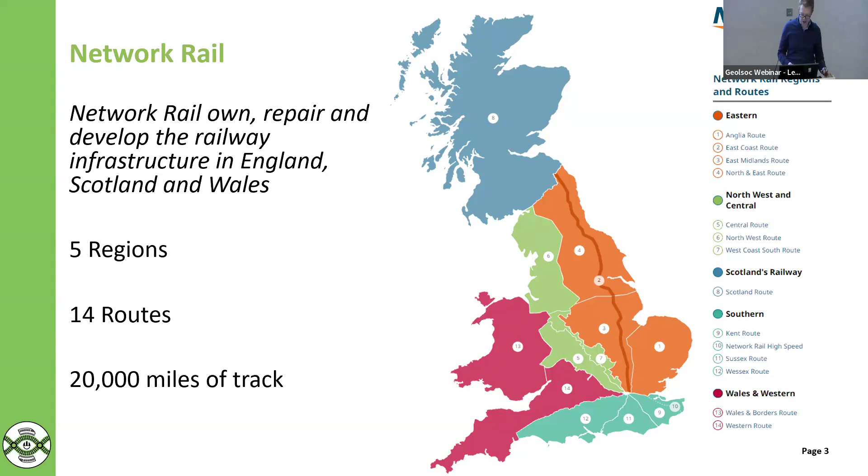So Network Rail Earthworks - there are about 192,000 100-metre segments of earthwork that we look after. The peak of construction was in the 1840s and 50s. Some earthworks are a bit younger, some of them are pre-Victorian.

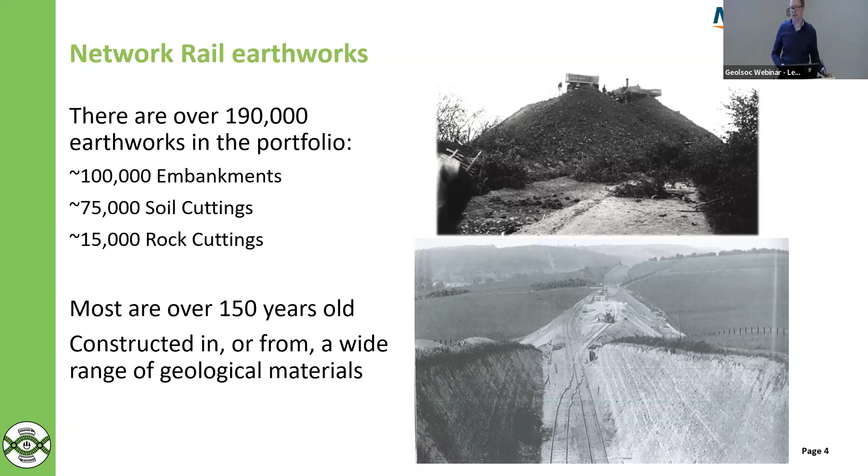I think we judge the original railway builders somewhat harshly through the lens of a modern design code sometimes. I expect most people here are geologists or engineers and have probably at some point or other worked for a demanding, geotechnically unaware client or manager. Imagine what it was like then, when there was immense pressure to build and open railways as soon and as cheaply as possible, to firstly attract the capital investment, but then to expedite the return on capital. So really the engineers had no choice but to minimise costs through minimising energy, land take and earth moving. And what we're left with today is a legacy of oversteep earthworks.

So formal management of railway earthworks began in the late 1990s following a fatal accident at Ais Gill on the Settle and Carlisle line, which had just been saved from closure at that time. The foundations were laid then for our principal controlling standard, NR L2 CIV 086, management of earthworks. And what we're talking about tonight are some substantial changes to Module 1, evaluation, and Module 2, assessment, which we'll come on to.

The catalyst for such significant changes was another fatal incident at Carmont in Scotland in August 2020, where 3 people died. That was the first such incident since Ais Gill. There were several investigations following Carmont, but one of them, commissioned by our Chief Executive Andrew Haines, asked Lord Robert Mair to undertake a holistic review of earthworks management in Network Rail - the scope of that review wasn't constrained to the factors around the accident. Lord Mair's task force reported back the following year with over 50 recommendations for Network Rail to address.

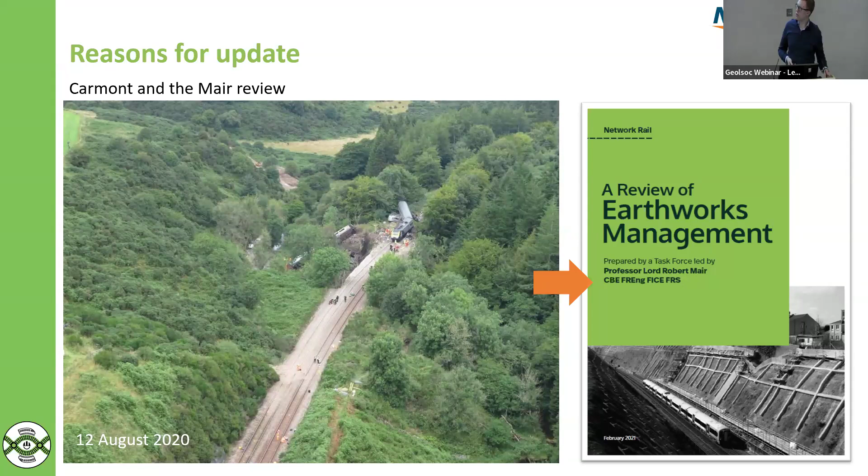So just looking at our management of earthworks in a simplified way, we start off gathering data. More often than not, that has been using people equipped with tablets or iPads on site, but is increasingly drawing on other means of data capture. We make decisions about earthworks in a process called evaluation, the management actions needed and the management strategies that are appropriate. We prioritise actions because we live in a constrained world and we can't do absolutely everything we would like for our earthworks. And then finally, we get to the point where we're taking action. That can range from rebuilding an earthwork, which is done very rarely, to writing a letter to an adjacent landowner asking them to do or not do something with drainage or vegetation management.

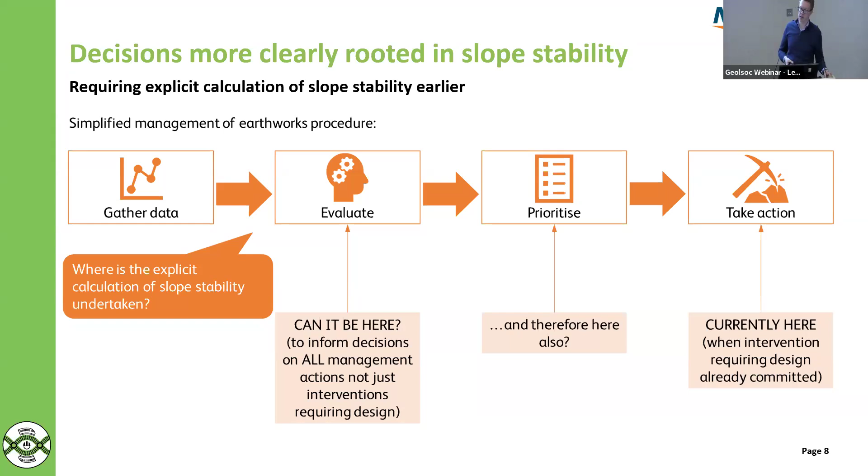So one of the themes of Lord Mair's questions and recommendations was where in that procedure is the explicit calculation of slope stability? And the honest answer is, once we're already at the take action stage and once we've already committed to a renew or refurb type capital intervention and we are undertaking assessment as the basis of geotechnical design. A really strong challenge came back as to whether that can be done much sooner in the process. Can we be thinking about slope stability much more formally at the evaluation stage, which would then benefit prioritisation as well?

So we have been, over the last few years with the team at MOTS, trying to address that question. In a nutshell, what we've done is reconfigure the evaluation procedure around a novel tiered earthwork assessment approach.

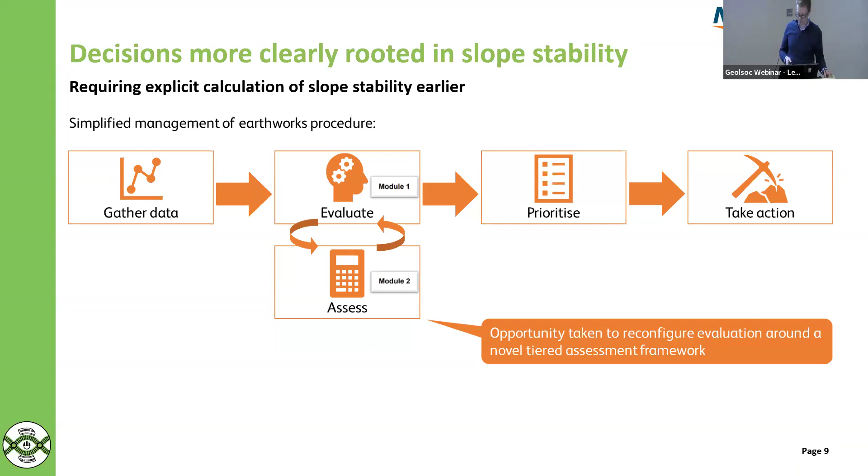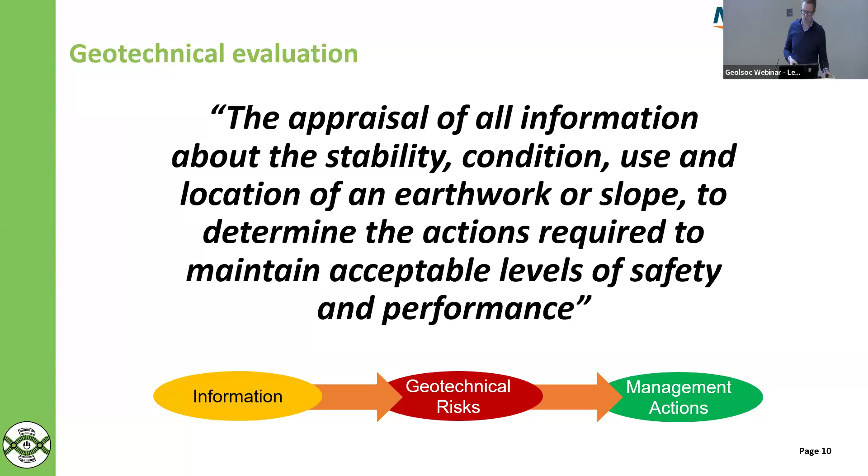So the aggregation of these structured and searchable risk statements across physical whole earthworks, across lines of route, across administrative geographies, then gives rise to a geotechnical risk register in a slightly different way to what most people might understand it from projects. But my view is that this will be an incredibly useful tool in the communication of risk, especially with non-geotechnical audiences, the calibration of the risk compass between different evaluators and asset engineers, and really the sort of audit question on why are we undertaking actions and what problems are we actually solving.

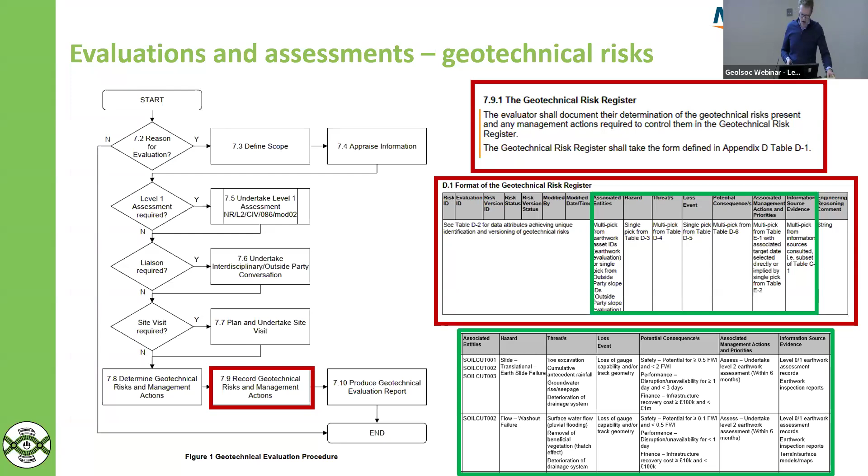So the role of assessment, which is a different procedure within NR 086, is to help the evaluator actually determine and formulate those geotechnical risk statements. That's rarely done at the minute, and we'll come on to why, but the whole idea of the tiered assessment framework is to give the evaluator an assessment and therefore an answer to the question of slope stability for every evaluation undertaken for any reason at any time.

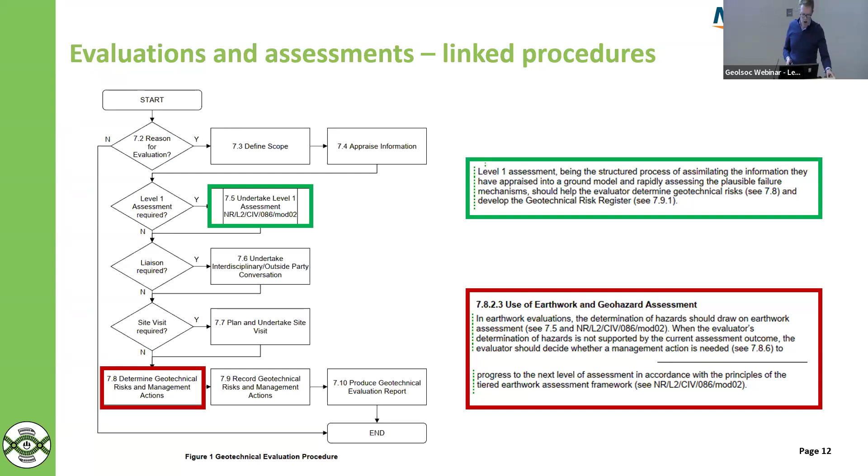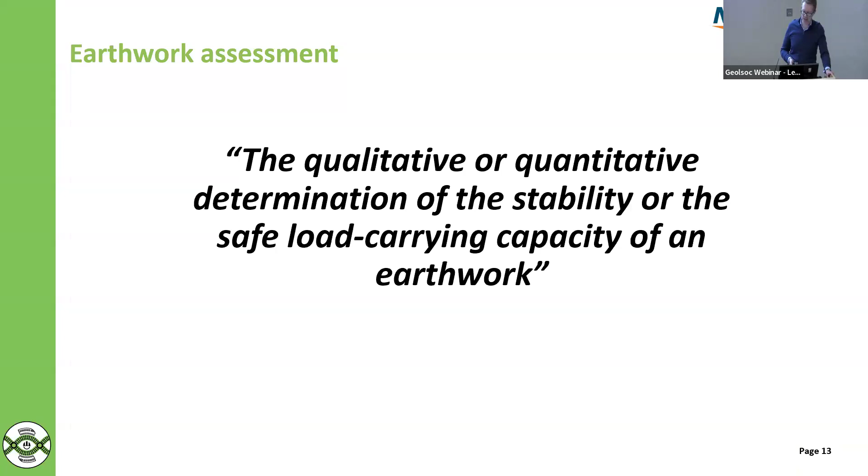So assessment, we also have a definition that has been largely unchanged since the birth of Network Rail: the qualitative or quantitative determination of the stability or load carrying capacity of an earthwork. And the question really is, well, why haven't you just been getting on and doing assessments, and what is now magically different in the new approach? So let me just introduce some of that.

It comes back to cost. When we are traditionally thinking about assessment, I'm sure most people have in their mind's eye skilled people using sophisticated software, trying to execute analyses like limit equilibrium or finite elements or whatever to produce useful quantities like displacements or factors of safety. That requires knowledge of failure mechanisms, knowledge of the ground model, and that in turn requires expensive activities, which are especially expensive on the operational railway, like ground investigation and monitoring, certainly site inspection and desk study and so on. So the cost of all that for one of those 100-metre earthwork segments, we estimate, is broadly comparable with a refurbishment type intervention, which typically might be installing a crest drain or a localised regrade over 10 metres or something like that. So why do the assessment? Why not just do the refurb?

If we were to assess all of our earthworks, the cost would be in the region of £9 to £10 billion, which dwarfs our annual all-in £300 million expenditure nationally on earthworks. So clearly we have to do something different. We can't do what we've traditionally been doing.

So the new framework retains all the wonderful things that have been developed over the years in terms of traditional assessment, whether using conventional or advanced techniques, and augments that with lower level assessments. This is the nub of it, where you have to accept a trade-off of the assessment outcome certainty and the ground model maturity with a lower cost that then enables us to apply the assessment much more widely, and in fact to all of our earthworks, so that going back to evaluation, we've at least got the lowest level zero assessment available to the evaluator.

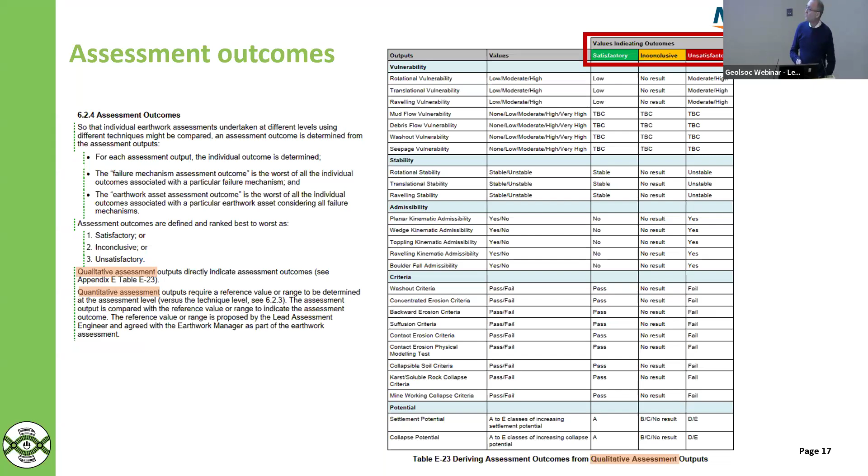So reading across any number of those, you can see something like looking at stability against a rotational failure - you can get an output that is in a stable or unstable state, which you can then map up to satisfactory and unsatisfactory. It's looked at in two ways, really, depending on the types of assessment techniques that are carried out. You can either have the qualitative type assessment or the quantitative assessment, which Mike referenced in the actual statement of the definition of an assessment.

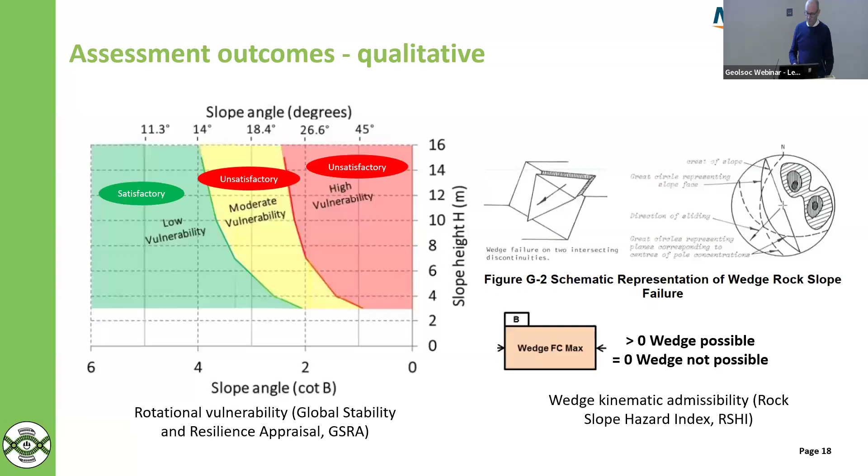Whether in reality, as you dive into more of that, it might be stable, but at the lowest levels it starts with that assumption. A quantitative assessment is where you're actually getting a number coming out from some kind of analysis.

So if you end up with a factor of safety in excess of that reference value, you're in a satisfactory state. If you're below that reference value, then it's an unsatisfactory state. It hasn't gone as far as stating what that reference value would be, because that's going to vary job to job, the decision that's been made.

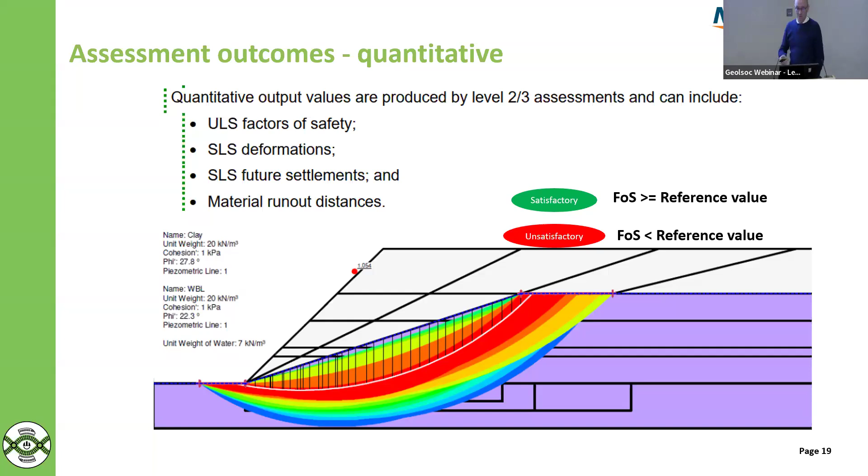So back in the day when you might have been looking for a factor of safety of 1.3 for analysis, we're not in that world anymore. It's decided on a site-by-site basis.

So another part of the assessment methodology is this concept of levels, and Mike introduced that quite well. From level 0 through to level 3, you're moving up in the complexity of the method, the amount of information that you're gathering. Your surety is going up, your uncertainty is coming down, but the cost is going up. So you can rationalize the assessment methodology as having level 0 being a virtual assessor carrying out a fully automated assessment, using methods and data available for the earthworks, but it's got the largest number of assumptions in the way that it's calculated, all the way through to the top level.

Level 3 is when you're at the real high-end level of assessment, and that's where we might be talking about finite element type analysis. You've got a lot of ground investigations being carried out, a decent understanding of what the groundwater is doing, etc., which obviously comes with the greatest cost.

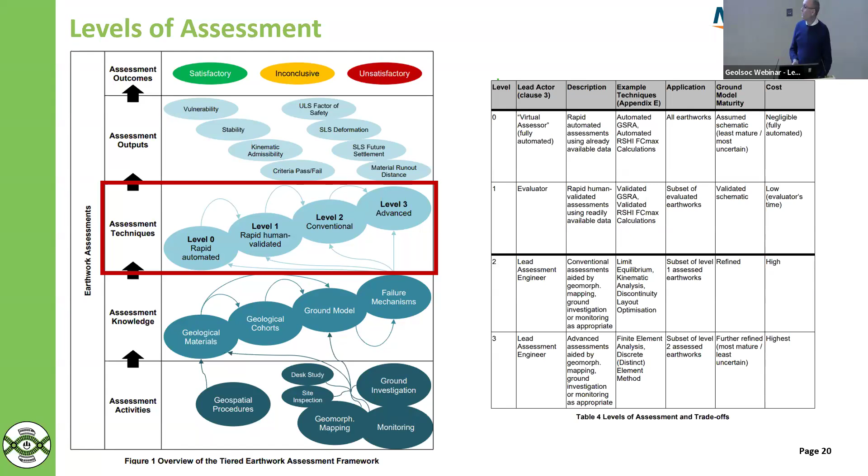We won't go into this in huge depth because I want to get onto more of the knowledge side of it and the geological concept constructions. But within the guidance in the module, we've gone through and carried out a detailed review of the types of analysis and assessment techniques that can be carried out.

They've been grouped together into generic types of assessment, so you know, GSRA plots are there, limit equilibrium, etc. They're related to the different levels of assessment, and then they relate back through to the type of failure mechanism that you're carrying that analysis out for.

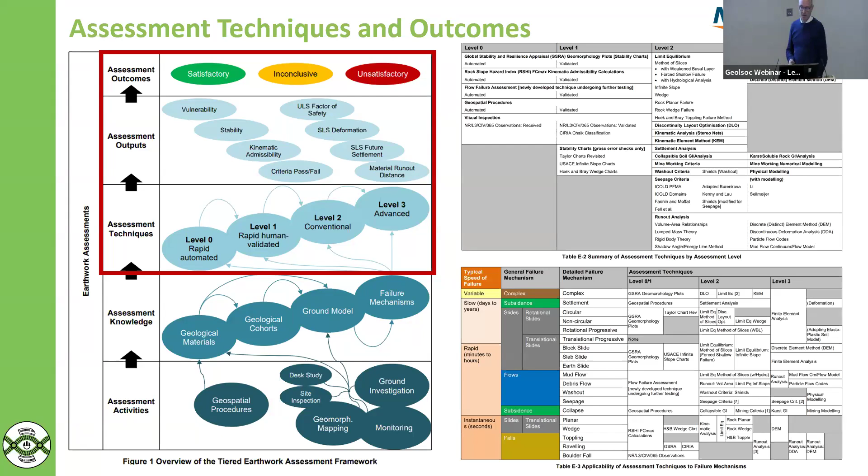It's not as prescriptive as saying the types of software that would then carry that out, because obviously that's something that can change over time. But it does go through the current types of analysis techniques that can be carried out for each of these things, recognizing, of course, that might change.

So moving down below the different techniques, the key thing we want to focus on now is thinking about how you feed those techniques with the knowledge that's required. And this is really where engineering geology has got the biggest part to play. So there are four bubbles you can see associated with assessment knowledge.

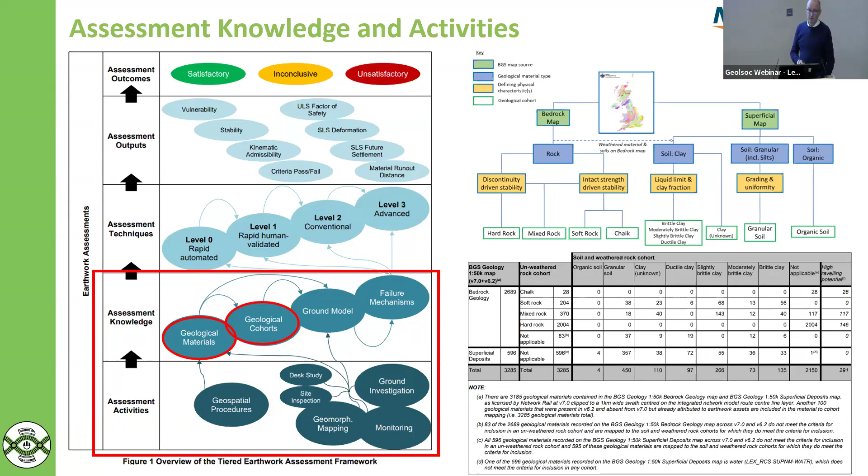I'm going to start by talking through geological materials and how those have been related together into geological cohorts. Then Verity is going to take us through the ground models and the failure mechanisms and how they feed into the process. So, geological materials and cohorts.

So the rail network that Mike introduced earlier, 20,000 miles of network, is interacting with 3,285 different geological materials as recorded by the British Geological Survey. That's about 2,700 bedrock materials and 600 superficial materials from their mapping.

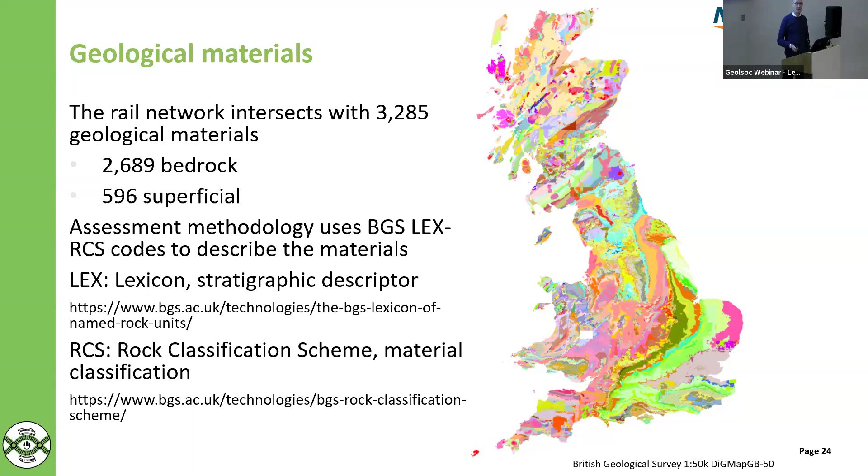For us to go through and assess and use all of that information on an asset on a code-by-code basis is plainly not feasible. So what we've made use of right from the start in the GSRA methodology is the BGS's lexicon RCS codes, which is a combination of the lexicon, the stratigraphic descriptors, and their rock classification scheme, which gives material classifications. We've used those as a means of grouping together different geological materials that have similar engineering behavior so that we can then consider the assessment against that level.

So this diagram shows how that grouping together, that cohorting, has been carried out. From a consideration of all the materials represented by the geological map, we look at both the bedrock map and the superficial map.

The bedrock is split down into rock, where the stability of a slope is driven either by the discontinuities within it, or on the other side by the intact strength that's driving the stability. Out of that, four cohorts for rock come out: hard rock, mixed rocks, soft rock, and chalk.

On the superficial side, for most of it but not the entirety, we've got the soils, where we split things down into clay materials, granular materials, and organic materials. The clays - I've got another slide which I'll come on to - we divide its behavior up by liquid limit and clay fraction. The granular soils are divided much more by grading and uniformity. You'll recognize the little dashed line coming across.

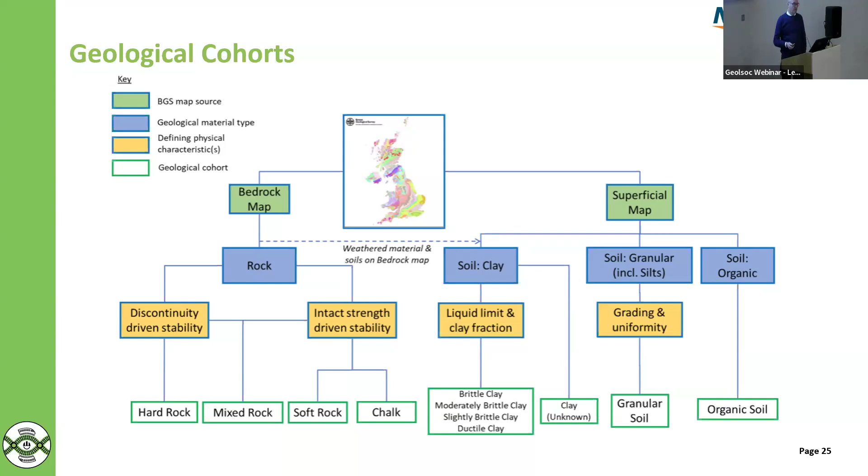Within the process and the guidance we set out, we take account of the fact that certain bedrock materials can weather to being in a soil-like state, and that's considered within the process, bringing them over into the clay cohorts. So the clay cohorts are subdivided according to their plasticity behavior within a chart which has axes of liquid limit on the x-axis against clay fraction content on the y-axis, building on work that's come from other asset owners through the years.

It's been applied in London Underground, it's been applied by Highways Agency, as was, and essentially divides up the materials into cohorts we've called the brittle clays. So that's where you've got your high plasticity clays, slightly brittle clays and moderately brittle clays, and ductile clays within different regions of that chart.

By classifying materials within those groups, we can start to bring together typical geotechnical parameters that allow us to feed that into slope stability calculations and start deriving those slope stability charts.

On the right is a piece of work included within the guidance that compares that method of dividing clay materials up with one way of looking at it, around a bounding value of a PI of about 25%, where you can see that tipping point between materials behaving in a brittle manner with a drop in strength from peak to residual, moving over to materials which are much more ductile. You can see it relates very well - the light lines show how that PI boundary would plot.

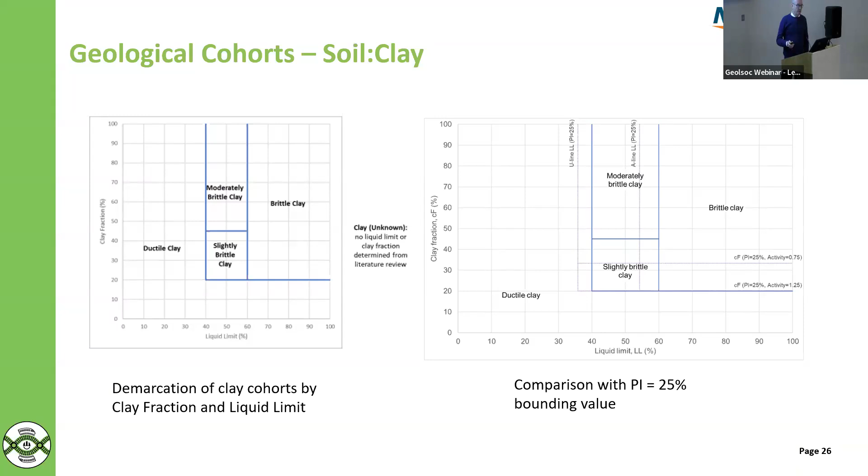What we get by doing it this way is a little bit more finesse in how the materials can be split up. This chart allows us to define bands around the different geological cohorts, and you can see examples of the types of materials that fall within those cohort names, which are kind of typical groups I'm sure a number of you would have worked with over the years.

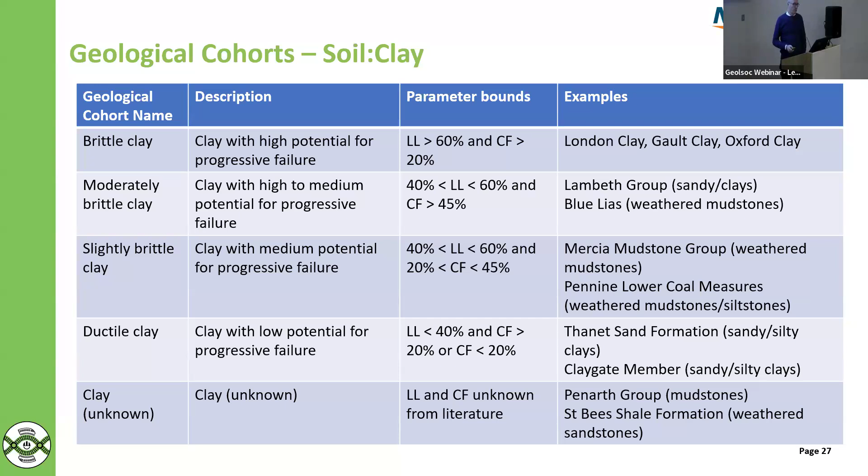I'm not going to go through this in huge detail, but one of the things also considered within the methodology is the potential for materials to weather from their bedrock state and become an issue as weathering to a soil, such as the over-consolidated high plasticity clays that feed into that. But also older mudrock and mixed rock materials can weather, and the biggest failure mechanism problem then becomes around the raveling of those slopes.

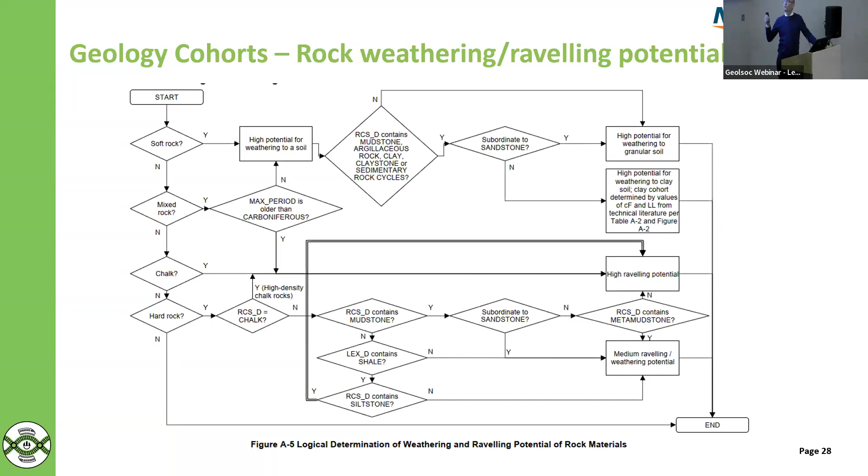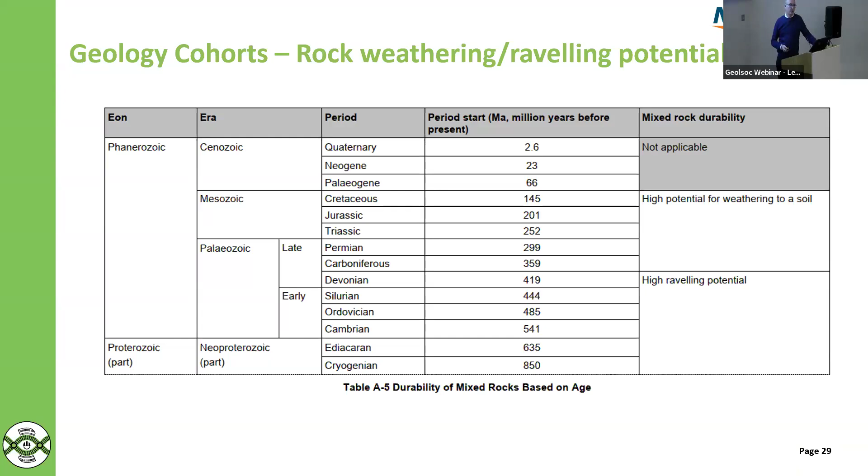This diagram takes you through the recipe by which the codification applied by the British Geological Survey units feeds through into the cohort that each of the materials has been put into. Just to add a bit more geology, here we show that the bounding age for the potential for weathering to a soil is set at Carboniferous and younger, and the older, more indurated rocks from that point are the ones considered to have the higher raveling potential.

One of the big challenges with Network Rail's assets, given their age and the lack of records held for them, is actually understanding what they're constructed out of. For cuttings, you can have a reasonable stab at what you're dealing with by looking at a geological map. When you're looking at embankments, obviously there's a lot more of a challenge.

So one of the pieces of work done, the body of work that's fed into this, was looking at trying to back-calculate what the embankments are likely to be made out of by virtue of their proximity to nearby cuttings that would have provided the fill material for those embankments. One of the early embodied pieces of work required was to look at the railway and back-calculate how it was constructed. We've got the engineer's line references which describe the individual routes, and we did an early piece of work to determine the age of construction.

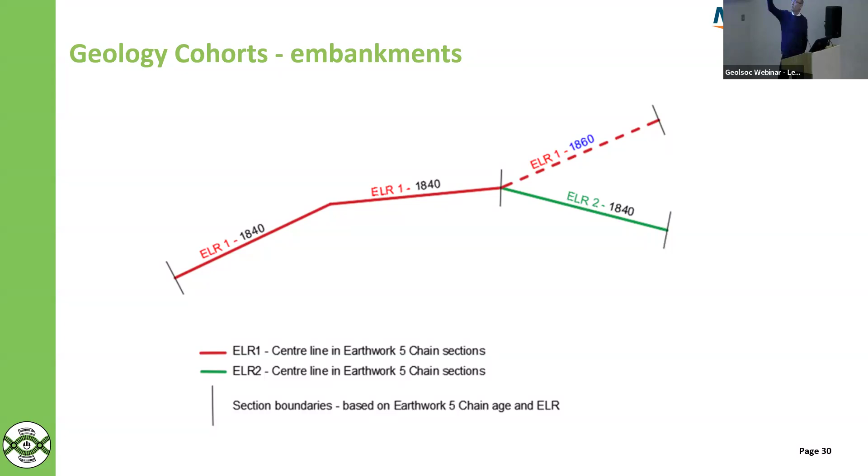This example shows how we would split this section of railway into 3 areas of construction. ELR number 1 has a construction date of 1840, and we can consider everything in that as having some kind of mass haul balance. We've got another section of the same ELR with a different date, so we consider that separately. And another section built at the same date but in a different part of the railway, so we split the network into these sections.

By applying that thinking across the whole network, we get as good a calculation as possible of the materials that would have been dug out of the cuttings. We can then apply that through a GIS procedure to keep filling up the nearest embankments until the volume of fill from the cuttings is used up, including an element of the bulking that would have occurred and the lack of compaction on the other end.

Because we get these calculations at discrete sections along the network, we can extrude that out onto the entirety of the network's length. Through that calculation, we can bring the geological materials of the nearby cuttings into the embankments. So it's almost like a back-calculated mass haul calculation.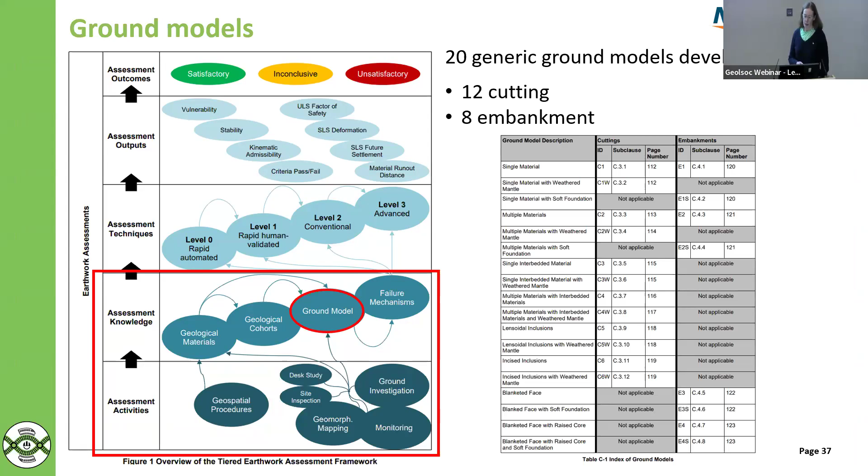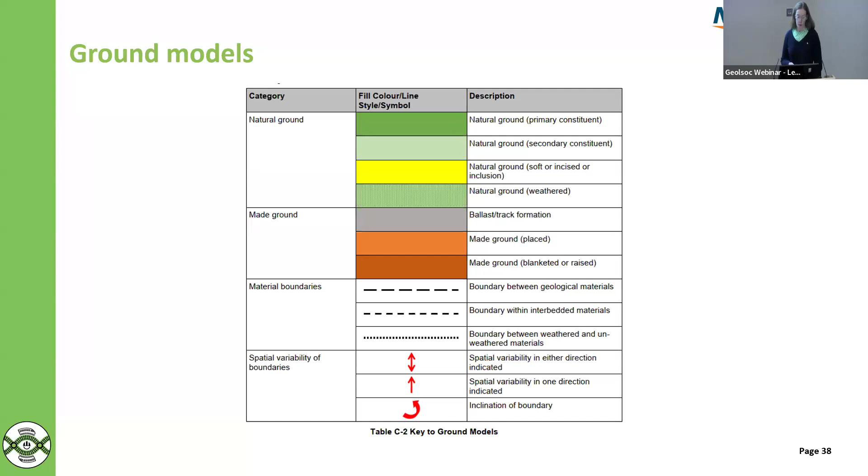As part of the task, we defined 20 generic ground models, 12 relating to cuttings and 8 to embankments. Each of these was defined, as shown in the schematic, in terms of whether they were natural ground or made ground, but also with the material boundaries noted, since ground models invariably have so many possible variations that we needed to simplify this down to something usable that still captured that variation within the definitions.

As part of this level 0, level 1 approach, when you don't have a lot of information, it can be applied across the whole network. The ground model is assumed, for example for cuttings, as a single material. There were 12 different ground models for cuttings. On the right-hand side you can see variations where you have interbedded materials underlain or overlain by a single material, noting the enormous amount of variability you could get with this.

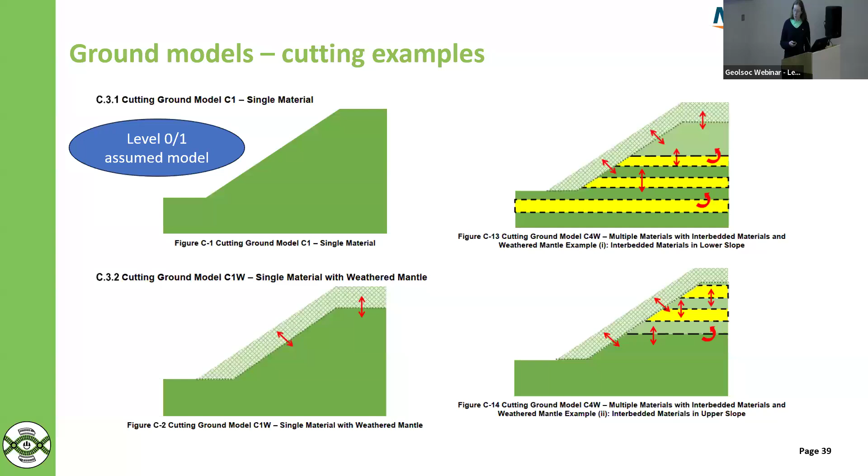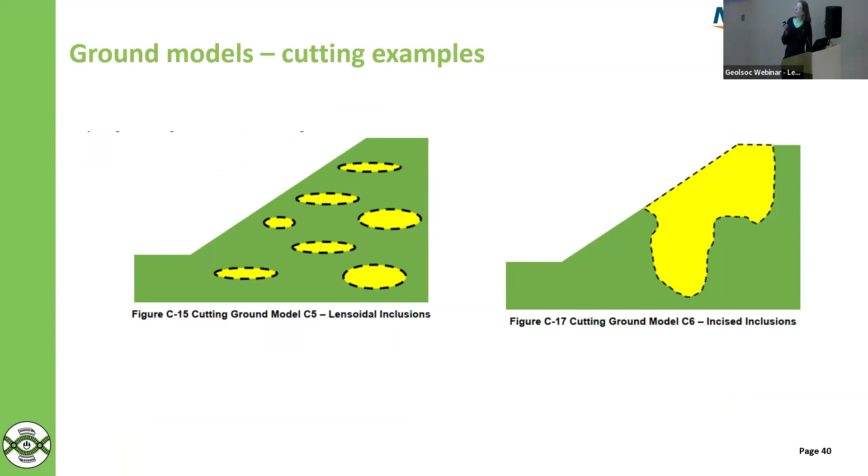We also included cases where you could have weathered material or weathered layers on top, though these could have various thicknesses, various dips, all sorts of options, so we tried to make these as catch-all as possible. We also had lensoidal inclusions on the left-hand side as a cutting, trying to cover all eventualities and the different geologies we encountered, allowing for things like chalk infill with incised inclusions.

So with the embankment examples we just got here, with the level 0 approach, you would assume it would be a single material, your embankment with underlying material and the ballast at the top. Again with the variations, you could also have soft materials at the bottom, and the thickness and variability of the original ground profile as well.

Moving into more complex options, as your information and knowledge increases through the levels approach, your ground model can develop as well. Where you understand the embankment has been widened or added to, you might have a blanketed face with raised cores, or the option where you've got potential soft material underneath. That was a common theme, and we tried to cover a lot of eventualities in that.

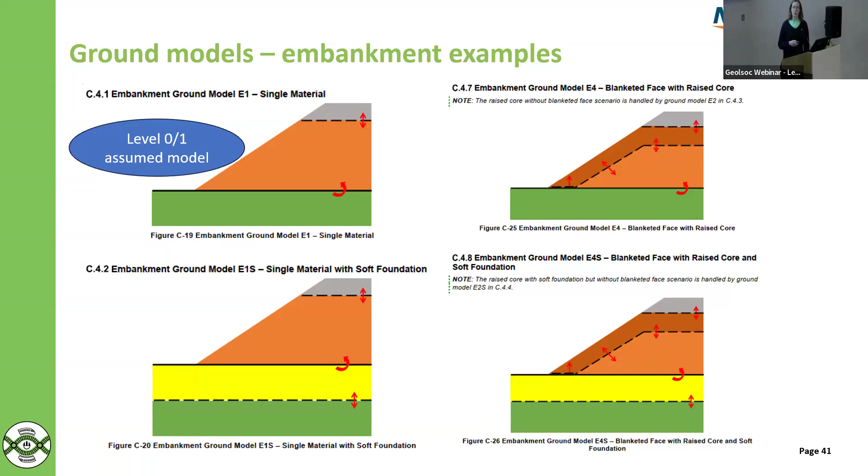Moving on to the next knowledge assessment bubble, as we're calling them: failure mechanisms. As part of this, we've defined 19 different failure mechanisms, going from falls, slides, flows, settlement, and collapse. If you have two or more of those, which you might do in many locations, we would define that as a complex failure mechanism.

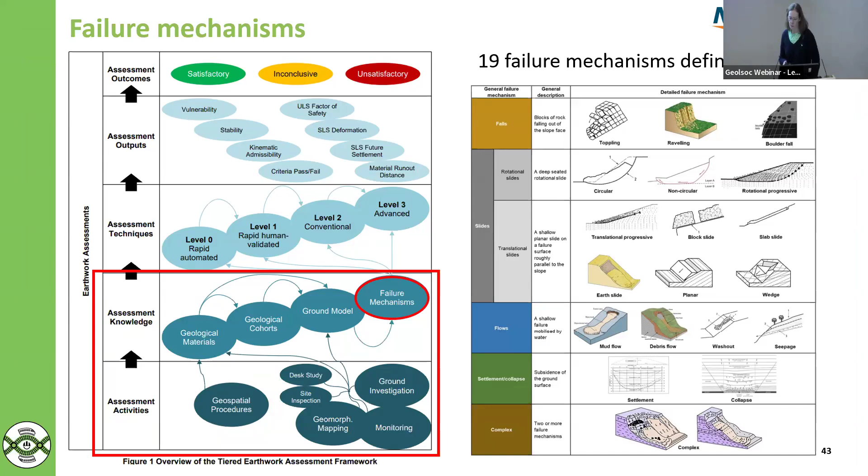Now the really important part of this was that there are several definitions. There are many different publications at the moment that already include and are very comprehensive on failure mechanisms, but a lot of these are related to natural slopes and not particularly to infrastructure slopes. So it was really important to bring those together and define them for Network Rail's assets, while making sure existing terminology for Network Rail and practices were included as far as possible.

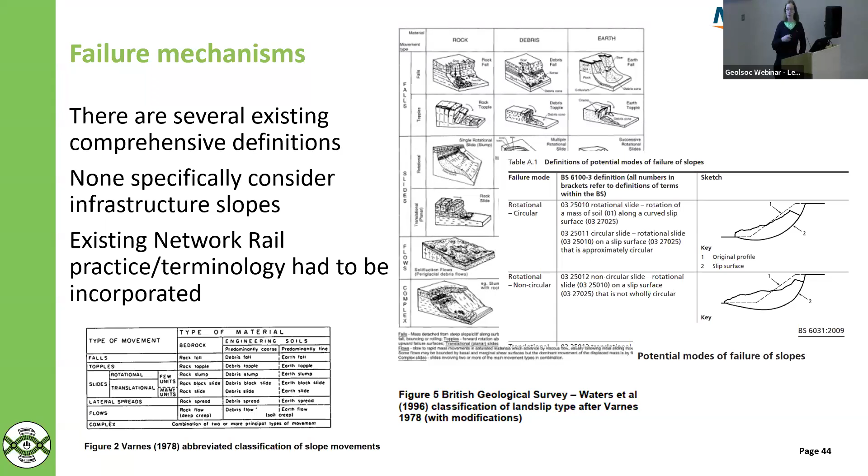The really important part of this as well is making sure that the same things got the same name. The amount of times two different people can call the same failure mechanism different things - it's really important as part of the process to make sure these are really well defined and people are using the same terminology. In the standard, they're all well defined, and I'll show you an example in a minute, but just to point out that an important part of this is trying to understand the speed of failure.

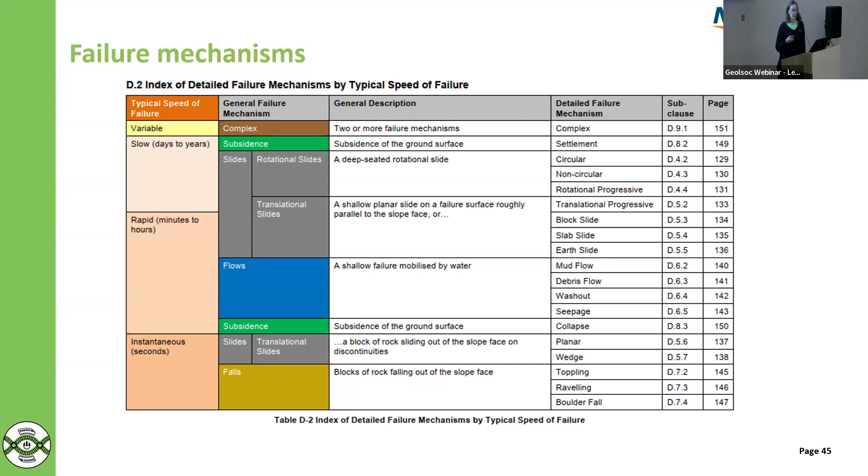That helps as well, trying to understand what you might need to do or the knowledge of your site. There's some additional information on the different types that I probably won't specifically go into, but there's lots of common terminology that you'll see and understand there. But again, the really important part is that the same thing is called the same thing by different people.

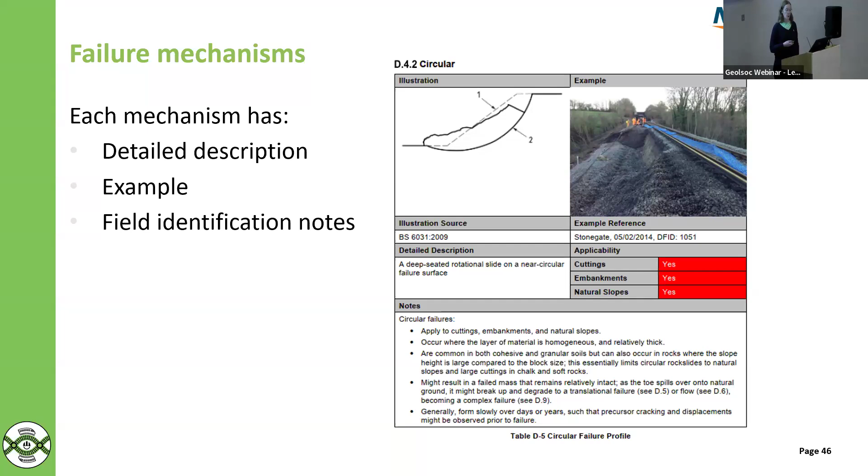As part of the standard, within the appendices, there are detailed descriptions, examples, some notes, and also some real life examples from out on the network. Something important as well, which I'll come to in a second, is the applicability of that failure mechanism - it's all about how can you understand what failure mechanisms are likely, so which ones do you need to assess or look at in more detail as part of your assessment.

A lot of the failure mechanisms, and you'll see with a lot of the work we've done, we've related everything back to failure mechanisms. So once you know those, you can use the tables and charts to understand what assessment techniques you can do at the different levels to understand what the likelihood of those failure mechanisms are.

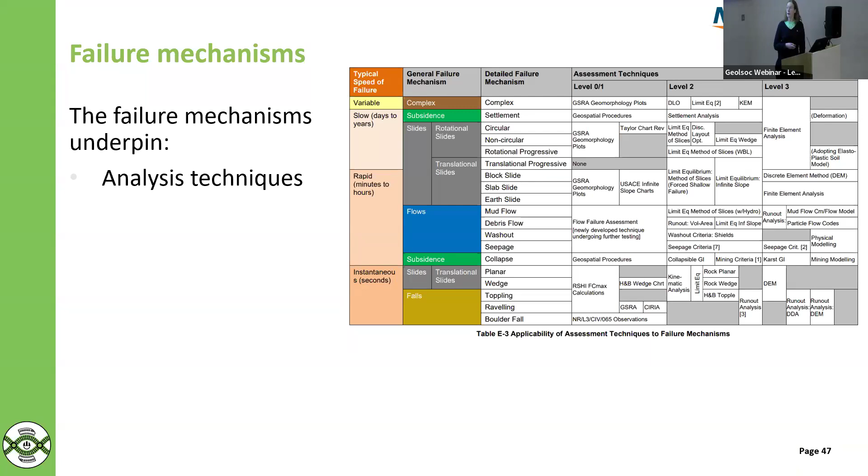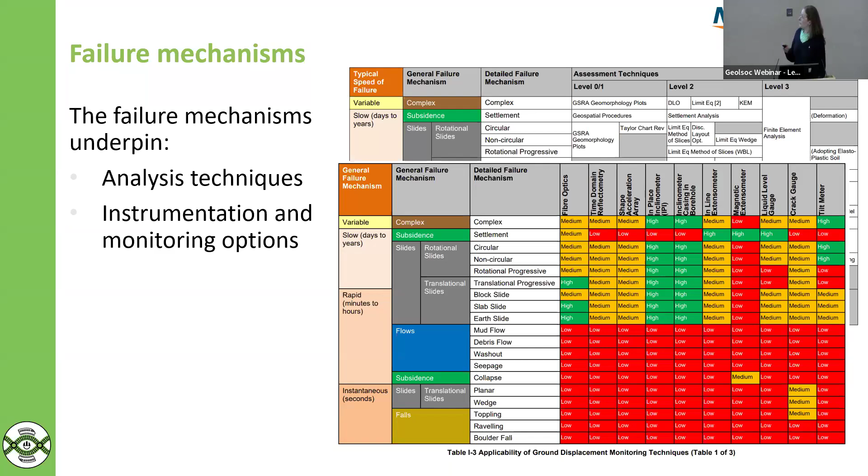Linking those to assessment techniques, what we've also done is, once you understand your potential failure mechanisms and your assessment techniques, sometimes instrumentation and monitoring is a really important part of the process, and will give you that more information and knowledge to feed into your assessment. There are lots of these different applicabilities that will show you - we've been able to link failure mechanisms to instrumentation for ground movement and groundwater monitoring, various different techniques you may wish to consider, specifically related back to those failure mechanisms.

With the applicability matrices, the cohorts, we've mapped all the cohorts to potential failure mechanisms. So if you think about that knowledge and those bubbles as you move through the process, you understand your geology, you can link that to your cohort, and from your cohort you can understand your ground models, and then what are the potential failure mechanisms. There's a generalized applicability - once you know your geology and your cohort, what are the potential failure mechanisms you need to be looking at as part of your assessment.

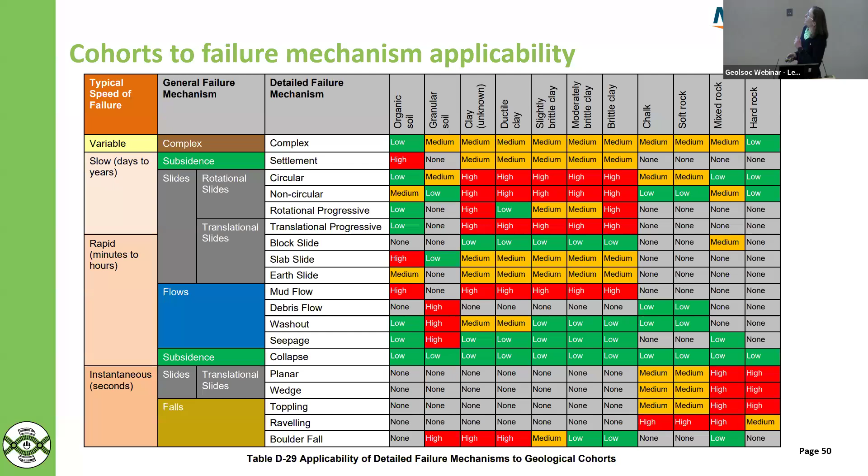So we've done that related to cohorts, but as I said, it's also related to your ground models as well. It's building that picture of what are the different considerations you need as part of your assessment.

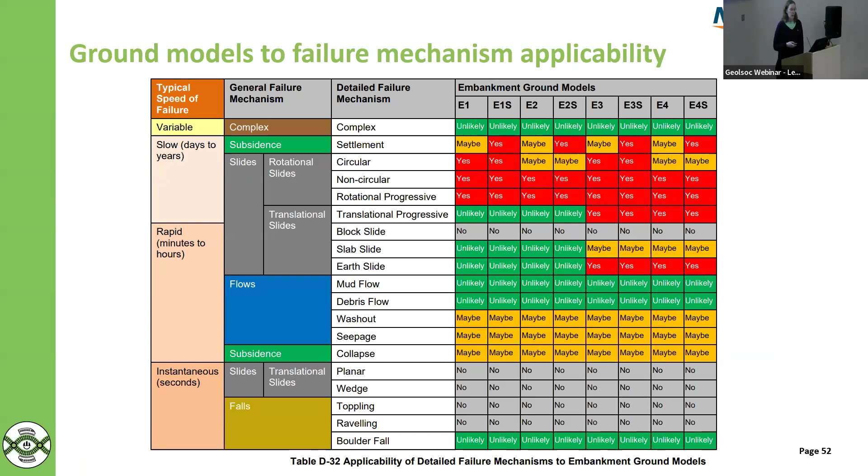So we've mapped it to the cutting ground models and embankment ground models, covering all the bubbles within our assessment knowledge. Something really important as part of this work was to improve geomorphological mapping. The idea was to include specific guidance on the use and value of good geomorphological mapping, since the information you can gain from it is really important to your assessment knowledge. The standards include improved guidance on roles and responsibilities, and the competencies people need to do this mapping and the procedures.

Also, with the technology and benefits, there's so much more desk-based and remote survey information, so making the most of that, as well as validation or additional information from field-based work. Then also thinking about improving terminology, keeping things common and consistent. There's some symbology and reporting requirements behind that, and of course some best practice examples in there.

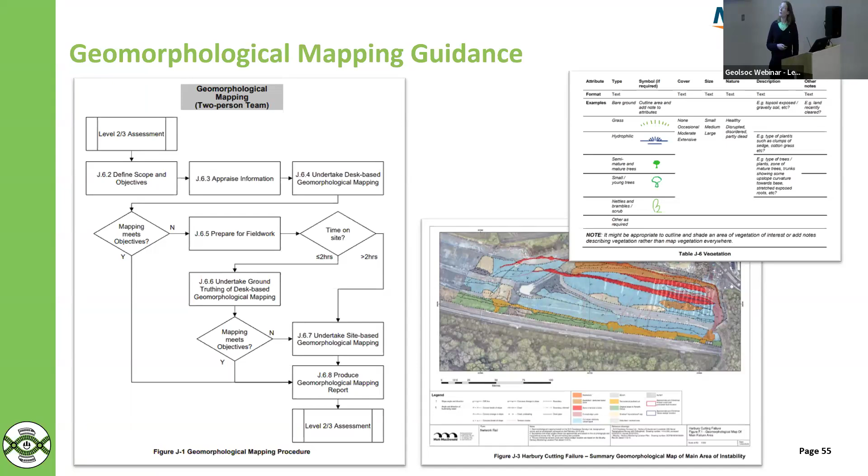So these are examples of our process on the left-hand side, the steps you need to follow, and if you need to go to site, have you got the information, what more can you add. An example there to show the kind of consistency from suppliers and the supply chain, because the value of a good geomorphological map - well, I'm preaching to the right people here, geologists - so there's just some information in there as well.

So now I'll get to hand back to Mike.

Thank you. So, last few slides.

So where we're up to is all of this new content we've heard about tonight is encapsulated into the new 086 standard, which was published last year and has a compliance date of this year. It doesn't actually require our route teams to do any assessment, but it requires them to set out what their appetite and desire to do assessment is in a regional earthwork assessment strategy.

And if they agree with Lord Mair's recommendation that assessment can benefit evaluation and prioritisation, then it will set out an assessment programme. The only way we can really fulfil that - Network Rail can't do it on its own, we need help from the supply chain. So it'll hopefully involve some people in this room.

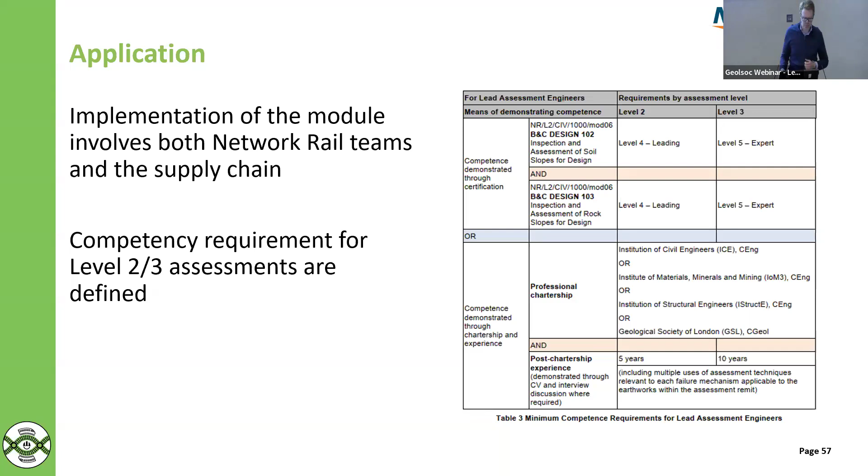I think I said this earlier, but level 2 and 3 assessment, the traditional form of assessment, we haven't tried to fundamentally change that. We're really augmenting it with lower level assessments that can be executed quickly at higher volume. But it is a slightly different perspective to when designing a new earthwork.

This is the procedure in the standard for level 2 and 3 assessment. Once the lead assessment engineer has received the remit, they've got to do a desk study, of course, but everything else from there on is optional. Even going to site - and that created a lot of controversy with someone in the front row - is considered an optional step, as is the geomorphological mapping, GI, and monitoring.

What the assessment engineer is asked to do is address the question at every step: do I have enough information? Is my ground model refined enough to actually apply an assessment technique and get a valid answer that could help the Network Rail evaluator make a better decision about how to manage this earthwork?

So the other thing to draw your attention to is we are trying to standardise the terminology. We've used desk study and site inspection because the second generation Eurocodes do, and then site investigation becomes ground investigation, and so on.

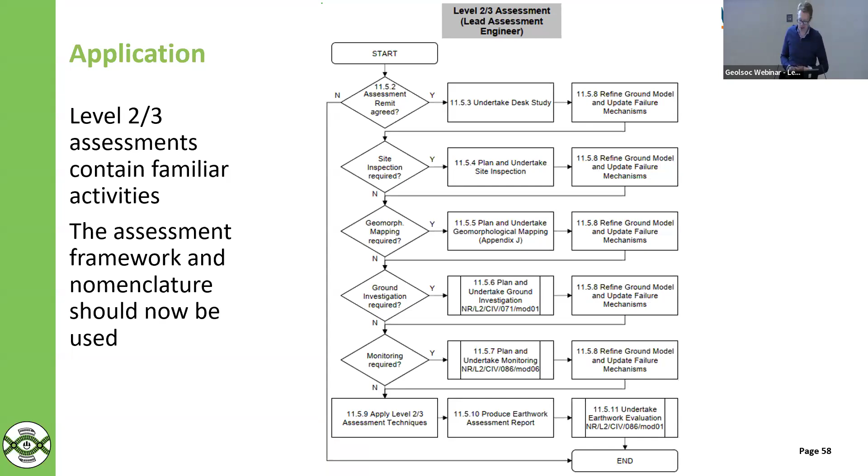Another place where we can affect some harmonisation is how these level 2 and 3 assessments are actually delivered, in terms of how the deliverables look. So a template is defined in the standard for what an earthwork assessment report looks like.

Again, this won't fundamentally change. We still expect to receive a report and associated files. The difference is, instead of zipping it and emailing it or FTPing it, we're aspiring to update our earthwork asset management application online, so that when an assessment is completed, it can be uploaded associated with the earthworks that were in scope. There's a form that's filled in that contains all the relevant metadata about the assessment, such that all the assessments become searchable, no matter what level of assessment it actually was.

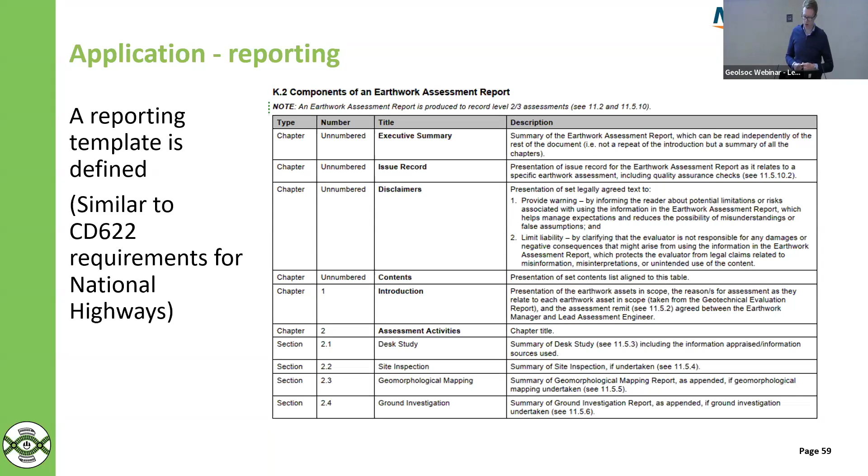So yeah, just a few things there on how we see the supply chain helping us. And that is the last slide. So yeah, thank you for listening. Are there any questions?

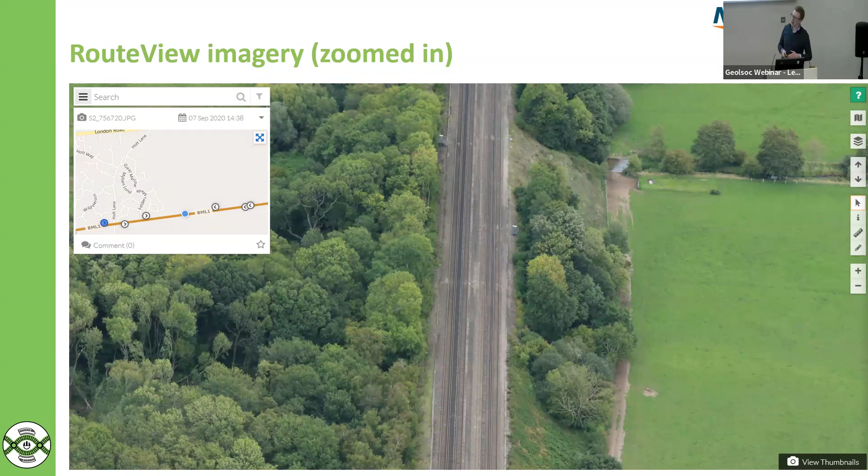And when we apply, if I just skip to the application of a global stability appraisal, this slide shows all of the stability lines, which mean factor of safety equals 1, from the library that would be applicable to this earthwork based on the geologies that we've estimated are present in the embankment core.

Now, each of these lines is based on a set of assumptions about the material strengths and the things like pore water pressures and so on. So where you've got evidence of previous failure, that is crucial information at level 1 in the selection of the most appropriate stability line, because at level 1 there can only be one line that you choose to be on the stable or unstable side of.

At level 0, which was Chris's illustration, there's so many assumptions. We use 2 lines and say there's a moderate vulnerability zone in the middle of them, but both of them mean factor of safety equals 1. They just represent different sets of assumptions. So it's an inexact science, but I'm keen to point that out to everybody.

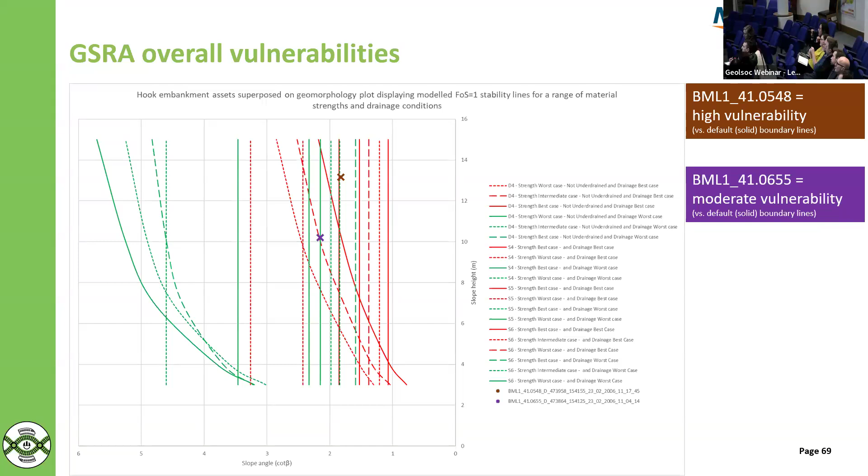Ethel Cortegana, Network Rail. When you explain about the back analysis to estimate the volume for the cut and fill, what is the assumption for the shoulders? Is it assumed that the embankment is made of the same material throughout, or would you distinguish core and shoulders?

Yeah, this might be useful for that as well. So the actual geometry is taken from the terrain model. And if you follow the methodology that Chris was describing and apply the cut fill balance - I think of it as sort of a re-simulation of the original construction - you end up with a result like this.

So these are the two assets that were affected by the Hook failure. You can see the first 3 rows have got the same code, and the second 3 rows have got the same code. About 50% of the assumed material is ductile clay - that's what that code is - and about 40% of the material is the brittle clay, and the rest of it's granular soil.

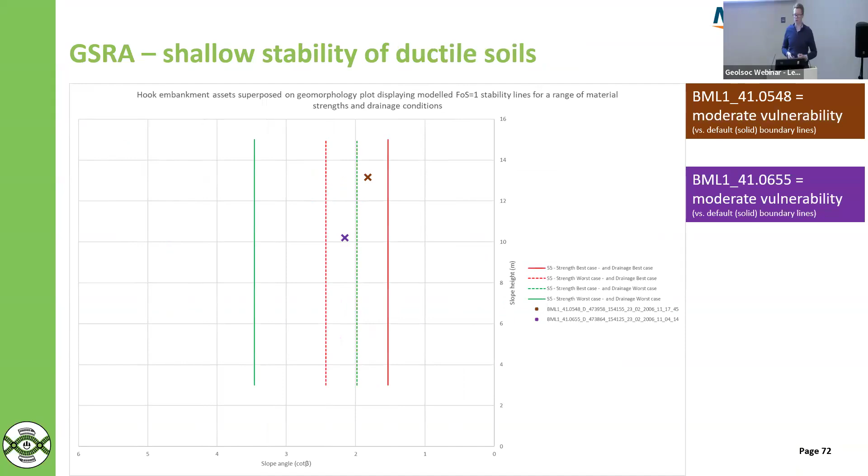But when we apply the level 0 assessment, we don't know how that's configured within the cross section. So the ground model at level 0 is just a uniform single material cross section for embankments. For cuttings, you've also got the weathered version, and we basically assess it 3 times - the same cross section - and say it's entirely granular, entirely brittle clay, or entirely ductile clay. That's what these stability lines are: rotational stability of the brittle clay, shallow translational stability of brittle clay, shallow stability of the ductile clay - you don't need a rotational assessment for that - and then shallow stability of the granular soils.

At level 1, I haven't got anything to show for that, but what I expect we're going to do is allow people to divide a cross section into facets and apply the assessment to each facet individually and to the overall geometry as appropriate.

Because if I think about cuttings, one of the main limitations of the use of the National Aerial Survey, the LiDAR, and the terrain model was with what I ended up calling biangular cuttings, where you've got a sort of competent rock overlain by maybe a glacial till or something, and there's a pronounced change in slope angle. We've just got an overall characteristic line joining the toe and the crest, and we're kind of overestimating the soil slope and thinking it's more unstable than it is, but we're underestimating the rock slope.

So that's for the level 1 assessor, the evaluator, to unravel as best they can, and if there's still too much uncertainty, then they can commission a level 2 assessment. The recommendation would be to consider that we have—

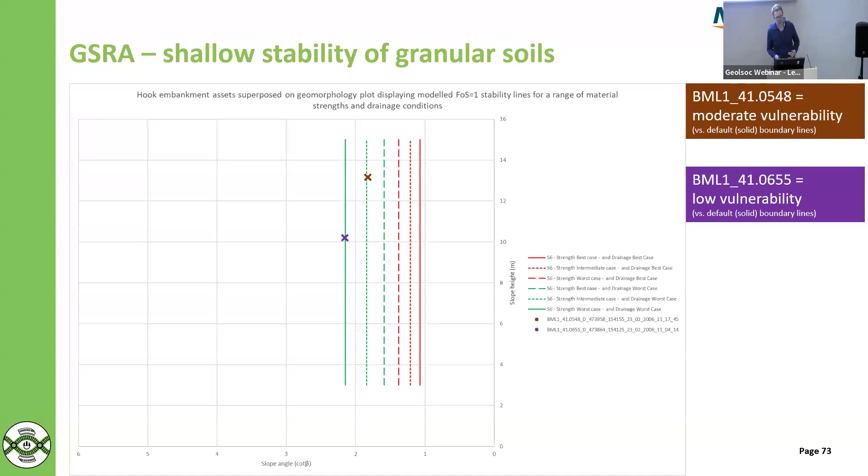It's geotechnical engineering—we've got to have sufficient flexibility within the methodology. You could look at this and say there's no granular material here, that's nonsense, I'm discarding that assessment. I think this is purely a clay fill embankment.

Hi, Michael Vance, Mott MacDonald. At any stage during the rewriting of the assessments, did you consider moving away from 100-meter lengths into whole assets? Sorry, I used to do highways, so...

No, I consider that every day. I think there's a whole earthwork approach, and I call them 100-meter segments here, but internally we call them 5 chain lengths, which is 110 yards, approximately the same. I think they work for different purposes.

When the teams 20 years ago were trying to figure out how to get a baseline survey of the network, it made absolute sense to divide it up into consistent chunks. Now, when we're thinking about assessments, I think you've got to take a whole earthwork perspective.

In the guidance—and this is a key change to evaluation—you might be driven to do an evaluation by something going on with one of the segments, for example exceptional track geometry deterioration. But what you must do is decide whether to extend your evaluation to the adjacent segments. Whether it's the whole earthwork or not is another matter, because some of them are quite long.

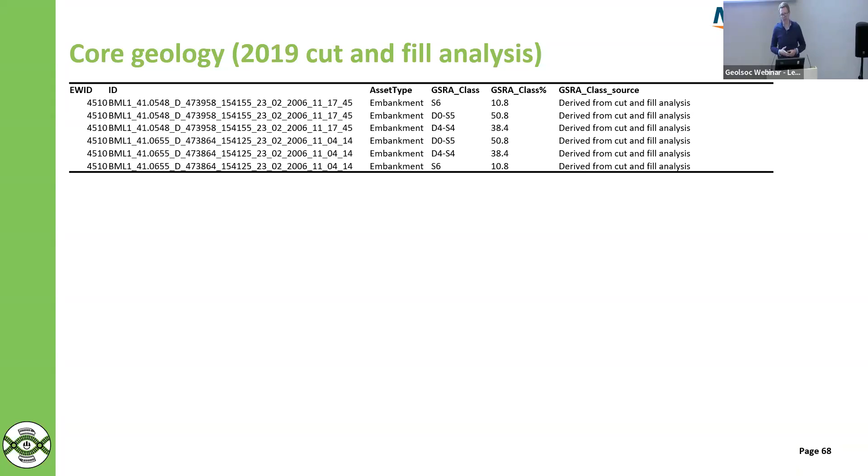And accordingly, the assessment can be applied to more than one 100-meter segment. It might be that one cross-section typifies the geometry of two miles of track, but it might be you need three or four cross-sections for a short length. I think that's a good example, isn't it?

It's quite interesting, that question, Mick, because as you know, for National Highways it's done differently—it's done for the whole asset. But then when you actually want to dive down to do certain things, like determining relationships between what you know about drainage in an earthwork and the assets, it's a lot easier in 100 meters. In fact, that's how we did some of the initial drainage policy work, because it was in 5 chain lengths—you could actually relate it to drainage records, which were also in 5 chain lengths.

And then for National Highways, when we did some work to assess deterioration of the assets, we split whole earthworks up into, surprisingly, 100-meter lengths, because you get benefits. So there are two sides to how you could do it, and both have advantages and disadvantages. I don't think there is a right answer, to be honest—there's pros and cons to both.

Hi, Rob Tolby from MOTS. The new assessment model creates vulnerability charts that have been created very much from first principles. When you've then created those charts, how did you then proof the charts and the findings? Maybe take us through that, because I'm sure you did—maybe historical records? Didn't your team do this work?

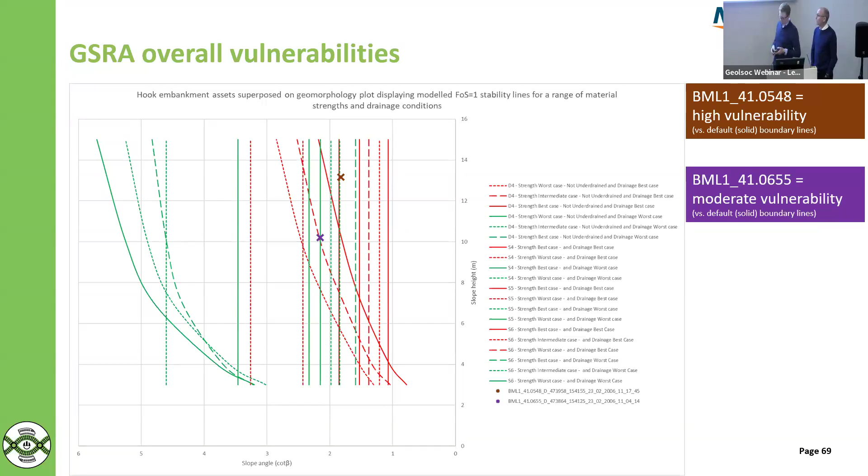Sorry, the groundwater side of it. Within the GSRA methodology for looking at translational failure and rotational failure, groundwater conditions are inherent in the modelling that was carried out that derives the suites of lines that come out. The biggest separation between the lines with similar parameters comes purely from the water condition that's assumed in the model. And that's set out within the guidance about how you account for that.

And embankments, it also includes assessment of whether there's under drainage due to a higher permeability material underneath an embankment. So groundwater, we didn't make enough of that in the presentation as we were going through, and that actually came back from Lord Mair's group when we presented it as well. So we haven't... but it is inherently considered in the modelling that was carried out for GSRA essentially.

Thank you. And sorry, you're going to say just what Chris was talking about, the separation of lines. So this is an example of the brittle soils. The cluster of lines on the right, that's one set of drainage assumptions, with the variation in the material strength assumptions, and then the cluster on the left is a different set of drainage conditions and the same variation in the material strengths.

So in terms of GSRA, which bear in mind is one technique in this whole framework, there's a great sensitivity to what you assume about groundwater and pore water pressures. These were all modelled in SLOPE/W, weren't they? Using the hydrostatic line approach. I think this is 40% and 70%.

Great, thank you. And another question here from Angus Wheeler, National Highways. Regarding the competencies, have you considered using the RoGEP grades?

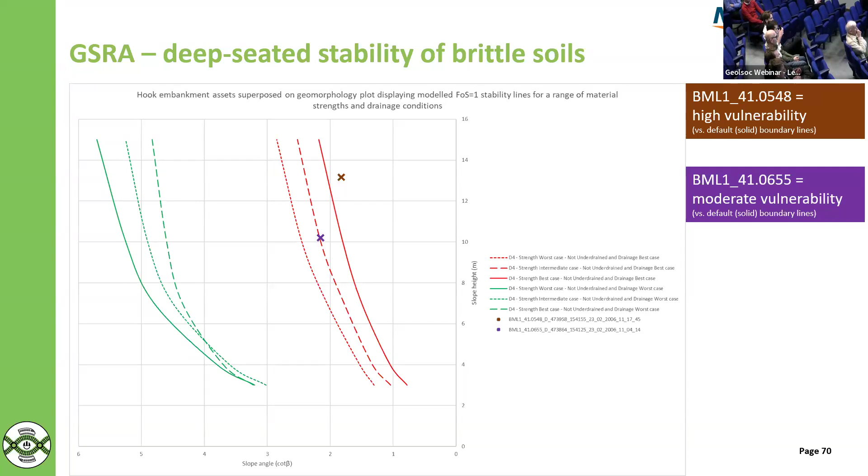Hi, Luke Johnstone, Atkins Realis. You already answered my question on the changing environment, so I'll ask another one. You have a huge amount of historical data on geology, ground investigation, failures, etc, and as you said, the velocity and amount of information coming in is increasing. Are you looking at any machine learning or AI solutions, especially at that level 0 assessment?

I'm not, because I don't understand it. No, I think the next generation of engineers coming through are going to really pick up that baton, aren't they? I'm not jumping ship just yet. But whenever anyone mentions ML or AI, I just think - I know what our data looks like, and it's not fit for that application just yet.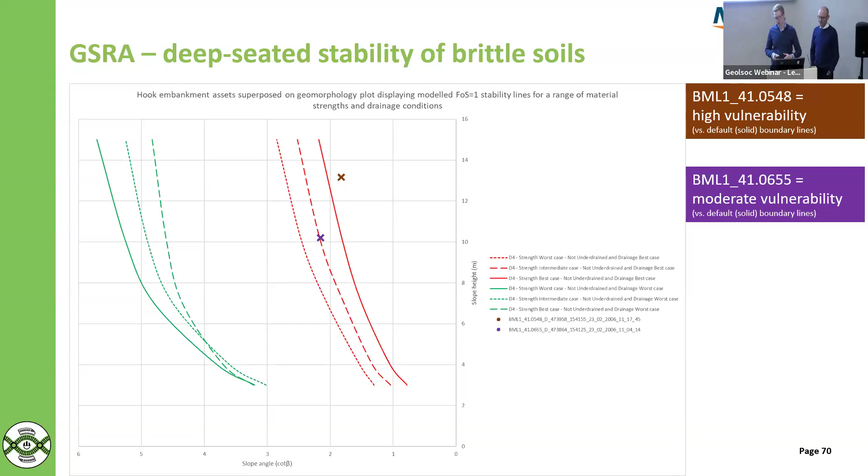But when you do start to see - sorry, it's a good job we put this in, isn't it, Chris? It's very good, yeah. The geometry information that informed the level 0 assessments came from a geospatial procedure applied nationally to the terrain model. The person that did that said to me, okay, it might not be 100% accurate, but it's like the same person examined the whole network, and that gets us one step closer to having consistent, dependable data.

And there are lots of steps happening right now that improve the reliability of the data we've got, and I think we will be in a position soon to start to apply that. But that, I always think, comes at the end, once you've done the real hard work, the real hard graft of sorting the data out.

So there's a couple of things I'd add to that. One is R&D work going on at the moment looking at application of data science techniques like Bayesian methods to allow feedback of constantly updating data to feed into the predictions you're making. The other thing about applying methods like that is I've seen a good example of data in this sphere being provided to researchers using neural network methods, reporting back to us that we've got a brilliant correlation between all the input data and this output RSHI value, saying this is what we want to do. To which my answer was, there's an algorithm that takes those and spits that out - so you've learned nothing.